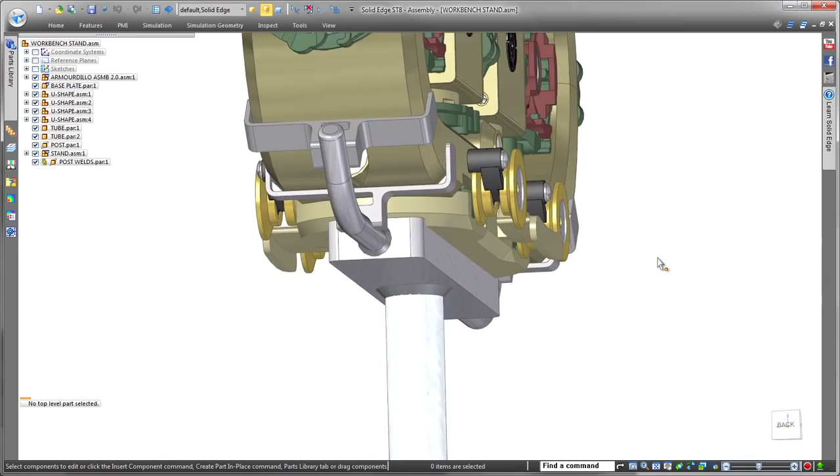In this demonstration, we'll make several changes to a workbench stand supporting a recovery robot's chassis. New time-saving file open functionality identifies top-level assembly files, letting you quickly retrieve the overall assembly without having to search through a long list of sub-assemblies. Here we'll open the top-level workbench stand assembly.

Leveraging the power of synchronous modeling speeds design changes. To stabilize the workbench fixture part, we'll widen its base just by dragging its side face, and we'll define a small offset to get an exact fit.

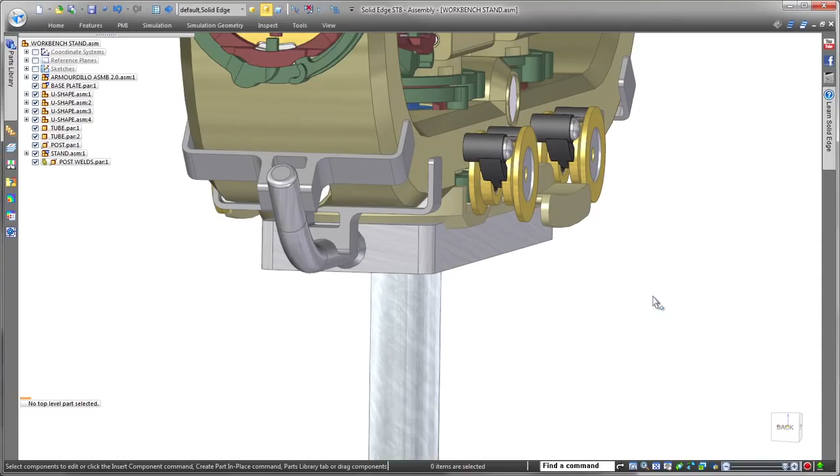Solid Edge specializes in providing all the tools you need to work on a part within an assembly. We'll activate the base plate part to implement some changes. Notice how Pathfinder indicates your active position within the assembly structure.

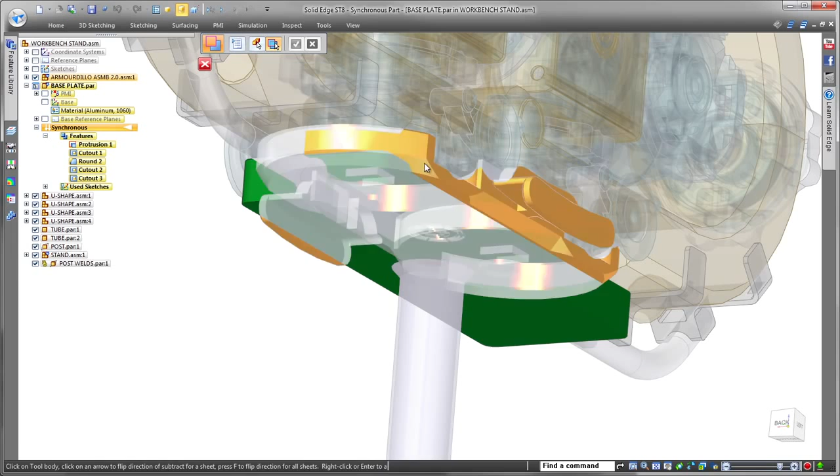Here, we want to remove material from the base plate to ensure a tight fit between the stand and robot chassis. We'll subtract material using the bottom of the chassis. Access to the top-level assembly components was crucial to get the correct result. Notice the result after removing material using the top-level assembly components. A perfect fit. This approach produces accurate results and maximizes your productivity.

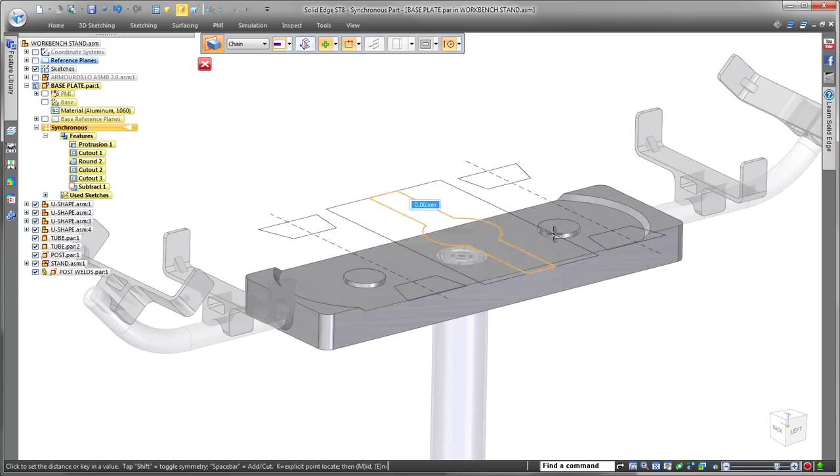Design reuse averts time-consuming and costly model recreation, so we'll make use of geometry already present in the top-level assembly. Watch as we use sketches from the workbench stand to create a relief pocket on the base plate and remove unnecessary features. Finally, we'll add some rounds to remove sharp edges and finish the base plate.

With Solid Edge, working on subsystems and components within a large assembly is efficient and very fast.

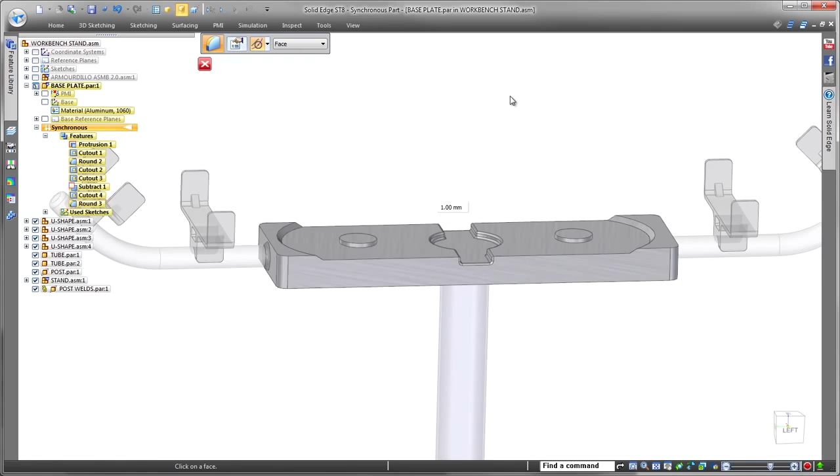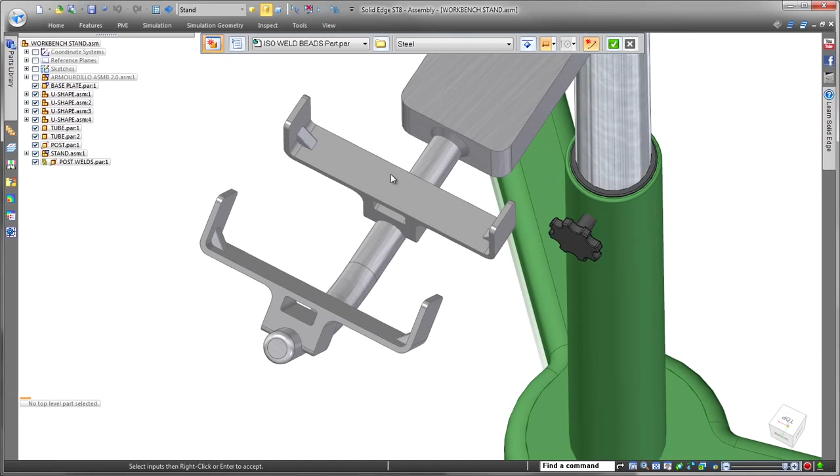Streamlined weldment design is delivered in Solid Edge ST8. The ability to create weld beads within the part environment gives you flexibility with the use of standard weld bead commands, part modeling techniques, or a combination of the two.

With weld beads defined in the part environment, you have full control of the material definition, appearance, and access to their mass properties. We'll continue to work in a top-down design scenario, as this gives easy access to the assembly components. Here we'll create weld beads between top-level components while in the part environment.

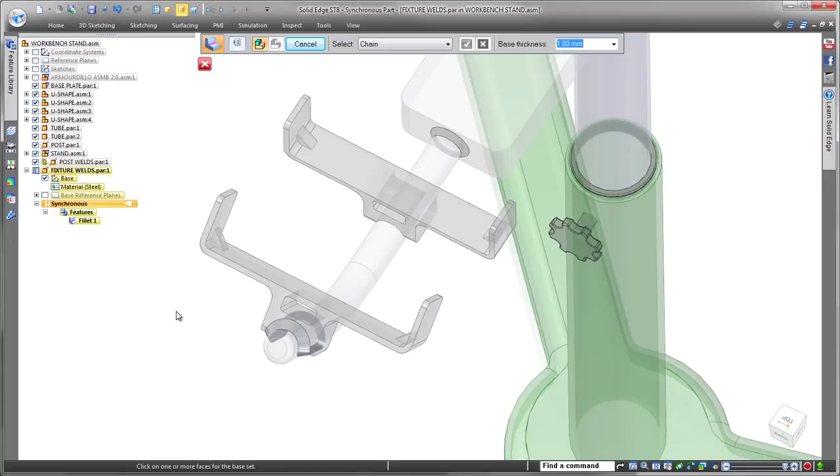Their material is defined in the part, not the assembly. Now that we've applied weld beads to one component, we can expedite the welding process to the other side with the use of duplicate part. Now that's easy, it's fast, and it greatly streamlines the welding process.

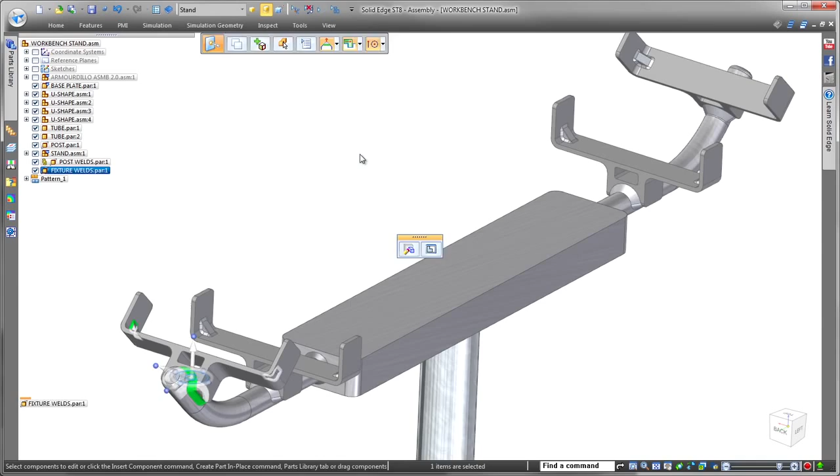When you need to efficiently document your weldment scenario on a drawing, Solid Edge shines. Watch as we place standard and auxiliary views with minimal mouse clicks. We'll apply a cutting plane to the front view, and from that cutting plane we'll pull a detail view to note information about the weld beads.

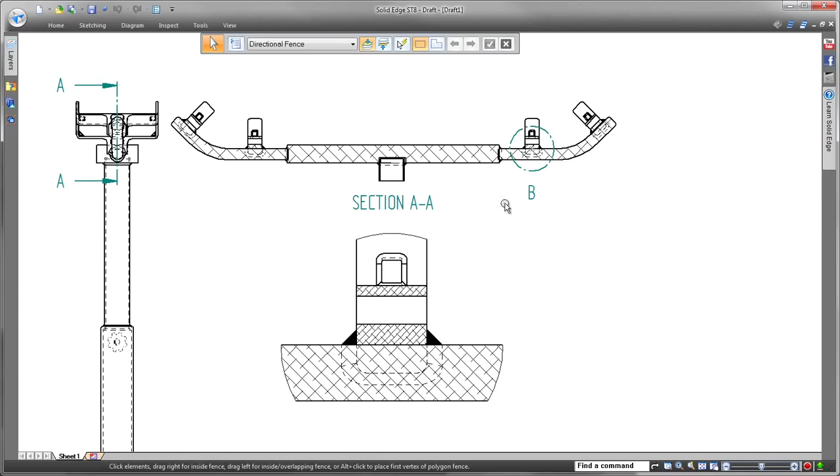Since we can extract weld bead information directly from the model, we save time and cut costs by avoiding duplication of effort. If a design change is approved, it'll be reflected throughout Solid Edge.

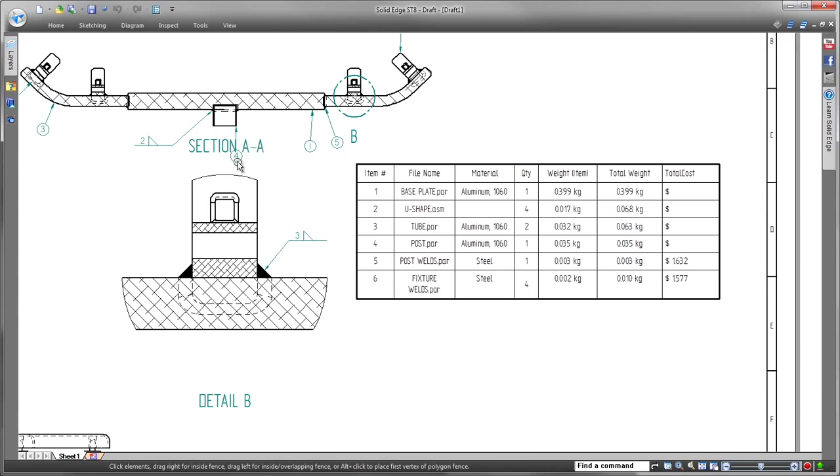Watch as we return to the assembly and increase the weld bead size between the post and fixture. Back in the draft environment, we're notified that a dimension moved, but also notice in the parts list the weld bead weight and cost also reflect the changes.

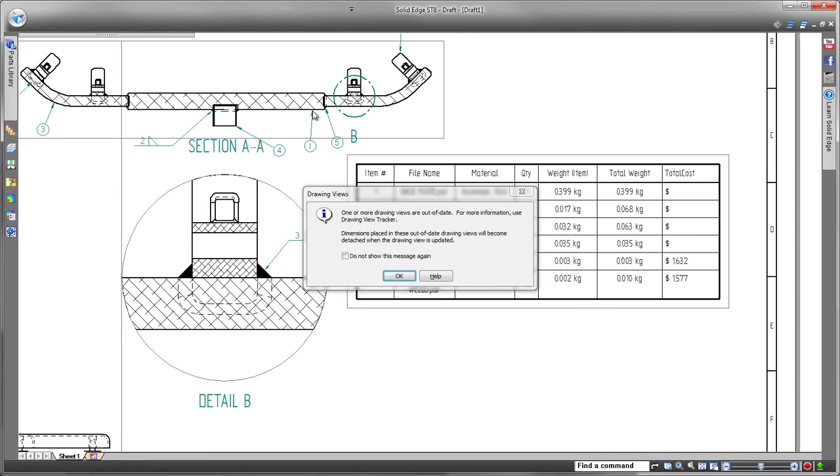Solid Edge with synchronous technology frees you to design more productively with the best tools and technology to get your job done right the first time.

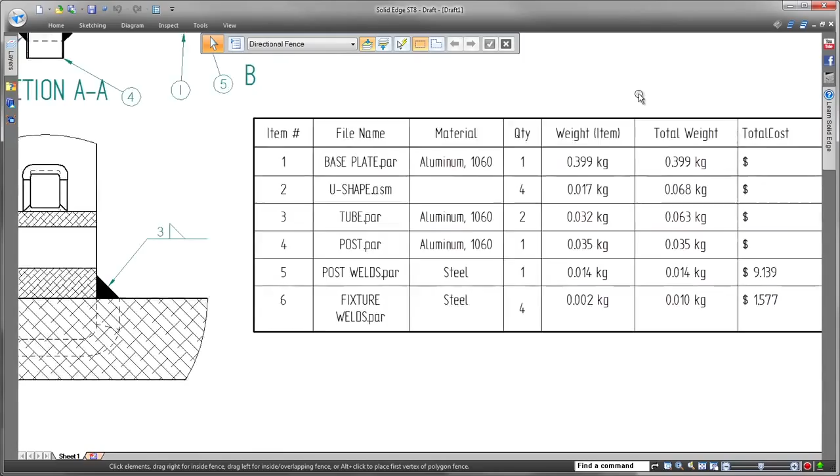Solid Edge. Design better.